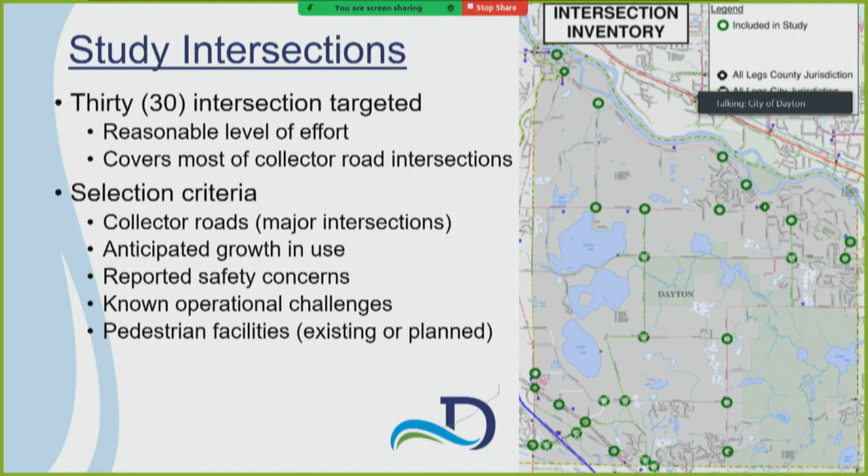Then, for prioritizing the intersections to figure out which ones we wanted to look at closer and which ones needed more attention, we selected criteria, which I'll go through on the next slide. For the evaluation, the primary focus was safety, and then pedestrian use. There's some overlap there with pedestrian safety as well, but it was much safety driven, as that's a lot of where the dollars come from for the grant monies, at least through the Hennepin County processes. It usually scores better if there are safety concerns. Then we identified thresholds for this criteria, so we knew what's good and what's bad.

They weren't necessarily specific values that say it's good or bad. Instead, we tried to use it so not all 30 fell into one category. We tried to find some balance where we chose a threshold to say these are the worst in that category, and so on. From that, we did the research to fill in and populate all the data—there are monster spreadsheets behind this with all the info used in the algorithms to calculate the priority intersections. So each category was bell curved across the 30 intersections.

But you didn't bell curve the intersections themselves, correct? Yeah, so you take one category and say these are the worst, these are okay, and these are the best. And in the next category, they could be totally different. Yes. So each category was done independently. Yes, thank you. That's good. Okay, yes.

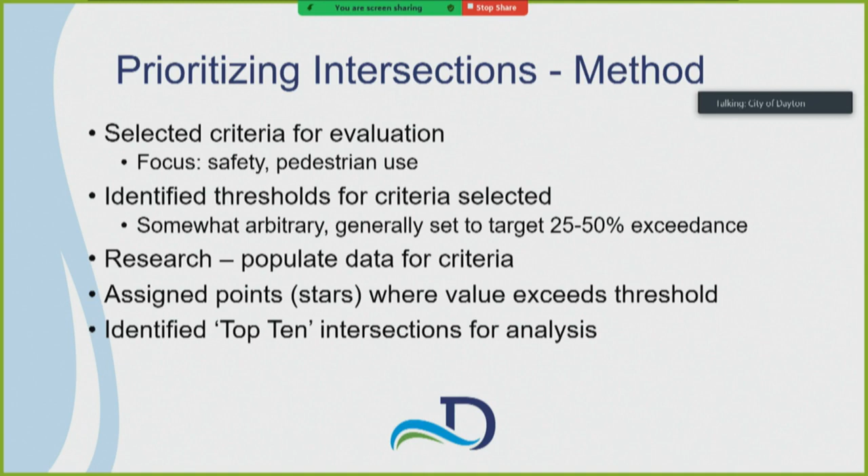And then we assigned what we did as stars or points to each one that was above the threshold in that category, and that's how we developed the top 10 list, if you will. So this was the criteria selected.

The AADT is the average daily traffic numbers, just the number of users. For this, we actually went out and hired a company to get counts throughout the entire city at all of the major roadways, so we knew how many people are using all of these intersections, and then we used a math formula to develop it.

So 5 million is the cross product between the two. We simply took how many on each leg, and then multiplied them together to get a number we could measure against each other.

Higher speed limits, we used those, and existing and planned pedestrian facilities if they were present or not. The number of lanes pedestrians had to cross—the more lanes you have to cross, typically the more dangerous the situation. We picked 4 as the threshold.

Crash data was a big one, so there's databases available for this. We went with severity—A and K severity, which is fatal or serious injury, not just property damage, but more serious than that. And then the type as well, if it was intersection related or the bike or pedestrian user related.

Skew of the intersections—in other words, if they don't quite cross at 90 degrees but instead there's a different angle—again, Territorial being a good example of that one at 81. That created a point. If they were on a horizontal or vertical curve, that could cause some sight distance issues, was another one we looked at.

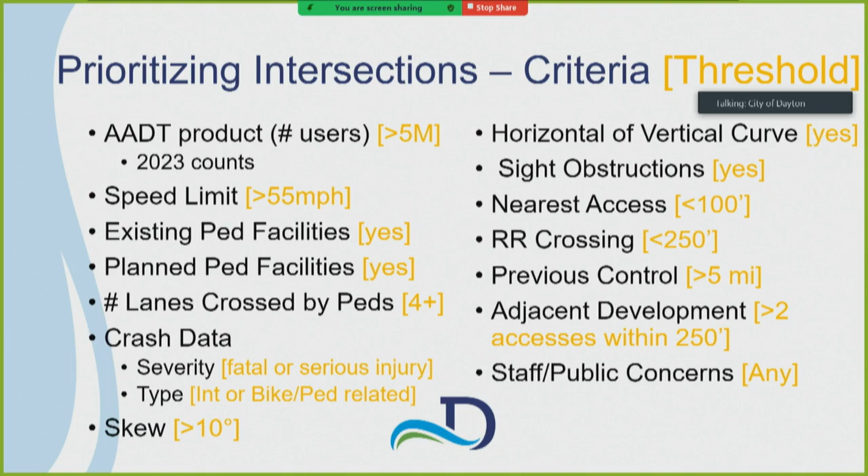And here were the results from those—those are the 10 in order of how they scored using the algorithm. I won't read all of these. I'm curious if any of these are surprising or concerning. I think staff felt they were pretty much in alignment with what we thought. I wouldn't say there were any significant surprises.

Maybe where they fell on the list was—I guess personally I wouldn't have thought River Road and Brockton Lane would be that high. Is there a lot of accidents there?

Not recently. Yeah, I wonder how that made the list. So, I have all the raw data, the report is 530 pages. I can try to sort through and get it, but it might not be a good use of time.

I'm sure a lot of it's traffic counts. But yeah, I wonder the same thing about Dayton River Road and Lawndale. There's been a lot of motorcycle fatalities on that, or intersection related. Because it's blind on one side?

Yep. So admittedly, that was the one I found most surprising until Zach and Marty pointed out what it looks like, and I went and drove it and realized why. You see the cross sitting right there. Yeah, it's terrible looking east, there's a lot of sight issues going on there, as you're on Lawndale looking east, over that hill.

So it's scored on the traffic speed limit, and active transportation facilities, so pedestrian facilities, because there is the ped ramp there.

Isn't it 30 miles an hour as you get into the city? Like 30, 55 there, stops south of there, doesn't it? Not on Brockton. That goes right up to the sign, doesn't it? Oh yeah, wow, is it?

Okay, and then there was either a fatality or a serious injury listed on there, at Brockton.

Previous control is more than 5 miles, and adjacent development probably being the McAlpine, I would guess, maybe being one of them, the access into there. Now granted, that's just an individual. I don't know which two they were.

Okay, and then also identified concerns from the staff or public. So that was where those points were generated on that one.

I do have a summary on the point one, so those are a little easier to look up. But is there any one of them on the list that you see that didn't make that intersection list that you think should have?

Yeah, so we have the priority intersections, right? We did 30 of them, identified the 10 based on the star listing and the criteria of the bell curve. But are there any of them up there that you or council see as an issue or concern that we missed or didn't get?

Also good criteria for roundabouts, that's where they are most effective. So you're going to double the amount of traffic on 117th as Brayburn Trails too finishes up there, roughly, once it's fully built up.

Any others? Just no? What about Wright County, coming out of our little portion, that neighborhood up there? Do we collect any data on that intersection possibly? We did not. I don't know if there's any concerns in that spot.

Yeah, no, it's not ours. That's not our— oh, you're right, the Dayton part doesn't get out to that road. It's like a 100-foot stretch through there, I think, crossroads down the road. Half the road is Dayton and half the road is— okay, three houses. Yeah, okay, didn't know that.

So a closer look at those top 10, we hired a company to go out and get actual data at all the intersections. They did counts at peak hours, how many lefts, throughs, rights, all of that, so we could look at the operational side of things. We also did some estimating of traffic growth in the area, using different modeling software to try to project what it might be over the next 20-year span.

There was a safety analysis conducted. I'm not going to pretend to understand this completely, but there's sophisticated software that does crash analysis, both with existing conditions that can predict future crash rates, and later in the study could be used to predict reductions in crash rates due to constructed improvements. Not a software I've used personally, but used heavily in a lot of the report.

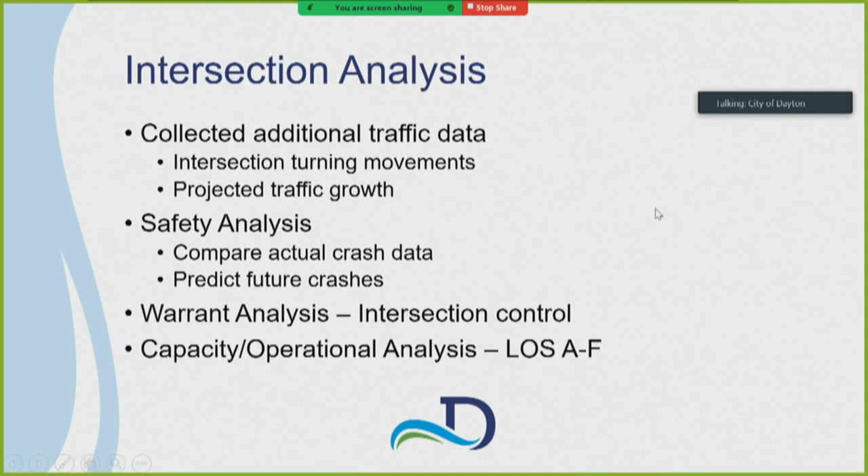So then we went through and did recommended improvements, so where the challenges are seen and what some potential improvements might be appropriate for mitigating those impacts. We did options on a few of them. Most of them we just had a single one, and then we estimated costs for the construction of the improvements.

And then again, using the software and MnDOT guidance, we tried to monetize the benefit of the projects to make them comparable, so we could run a cost-benefit ratio on these and see if the projects make sense. I don't know if folks are familiar with cost-benefit, but you monetize your benefit into a dollar amount.

You literally just take the benefit amount divided by the cost amount. If you're over one, there's a benefit to it. The higher the number, the more benefit. The smaller the number, less than one, the less benefit.

Where does the number come from? Thank you for asking. From the predictive software, and then it's monetized using software designed for this, and there's MnDOT guidance on associating it.

Sure, but what qualifies as benefit? Less wrecked cars, reduction in deaths, so there's a bunch of factors, and I'm probably missing a bunch of them, but like delays. If you're improving the level of service, there's less delay. People's time is money, so that's how benefit is calculated. I don't know what the exact values are, but the less delay caused at intersections, for example, is worth money because you're taking less of people's time. So there's a number put with that.

If you're increasing safety, it can predict, let's use an example, we're going from an intersection to a roundabout. That takes away the potential for T-bones or head-ons. So now your accidents are much fewer and they're much more minor, side swipes, so minor damage at best. Those have dollar amounts associated with them, so those are the savings realized.

It'll show on the summary slide I have here, not in great detail, but how you can kind of see how those are comparable. And then with those, we kind of took a stab at suggesting the short, mid, and long-term implementation projects.

Just meaning does it make sense to do them now, or is it maybe a little less important, or the situation hasn't really developed into a real issue but it should be monitored, and then maybe it should be done some period of time out. Purposely, we didn't try to label this with timelines because there's a lot of factors, but just to give a sense of, if we have the opportunity to build it next year, let's do it. If it's short term, if it's long term, let's monitor, kind of give that type.

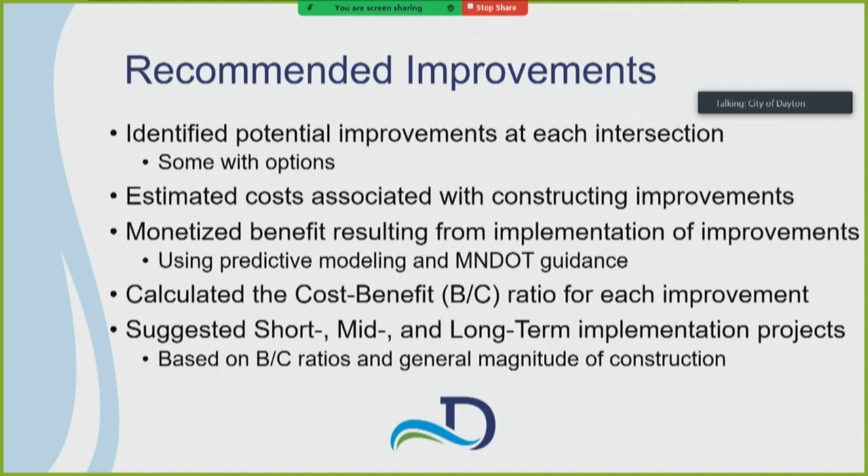So the actual recommendations for each of these. I do have these for all of the intersections, so there's a lot of them, just to prepare you.

Doing okay on time, but I don't want to get too hung up. There's about 14 slides, because there's a couple options with some of them. So I'll go through the first one. I marked a few as ones that have been discussed a little more that we could focus on, or I can try running through all of them. But you guys can let me know, and we'll see how we're doing on time.

So this one's Dayton River Road and Pineview. This was the number one intersection. So one option is to add the turn lanes.

We've had continued complaints, especially from Rosewood Lane residents, on coming out of there with the bypass lane. Now there might be some minor improvements here because the county is doing some striping changes that might help some. It's not the turn lane configuration here.

We requested that they do some pavement widening to accomplish this, and that was not an option with their project. So they're doing what they can with the striping under the current project. This would be a future improvement.

So the right turn lane is one option. Each of these will have a summary of the improvement and the cost estimate, and just to note, this is a construction cost estimate, not a total project cost estimate, but with a pretty high contingency, so it might not be too far off.

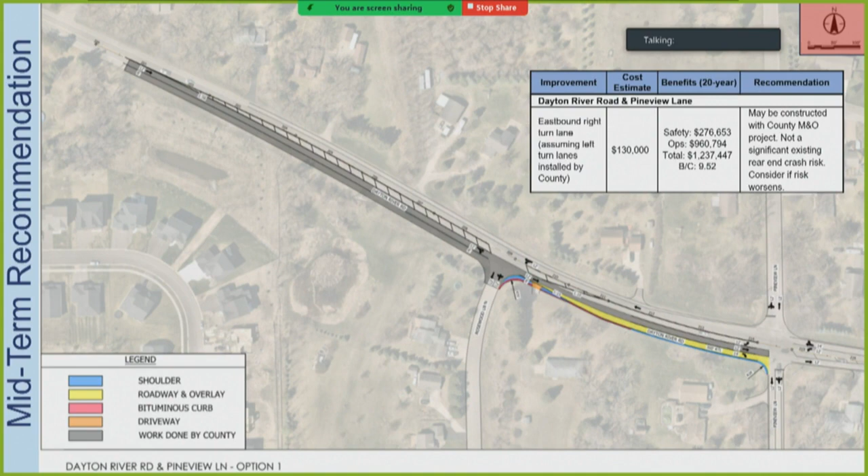Because if you have 90% or 98% of your traffic on one approach, now everybody is slowing down for the 10% coming this way. So, okay, everybody's got 15 more seconds in their life.

So I live on a dead end road that I get onto a main road with a roundabout. I think it's the best thing in the world. So I'm a big proponent of that, even when there's not a lot of traffic coming off the dead end. I agree with you completely.

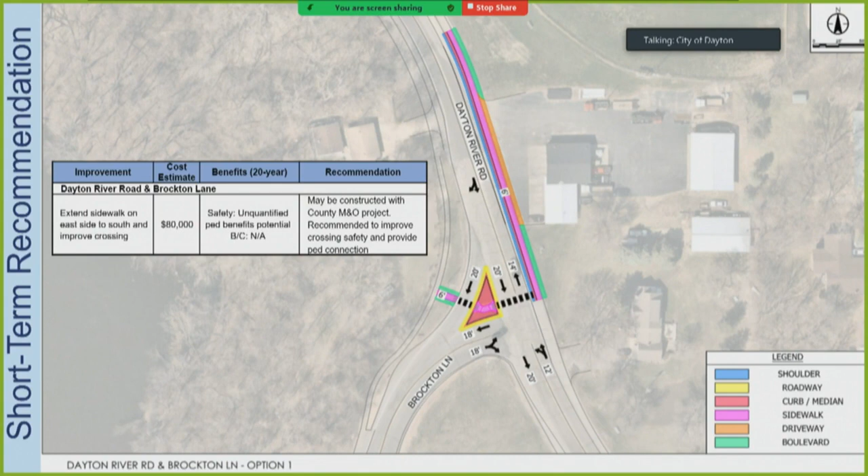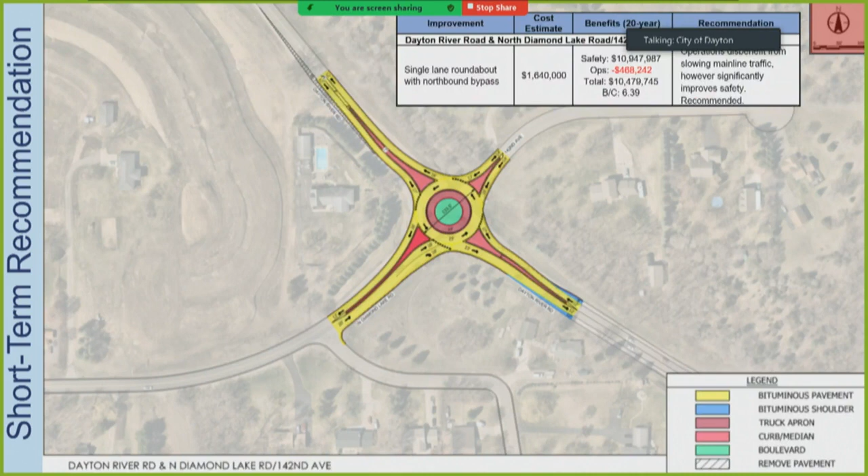Do you want to talk about Brockton Lane? No, you can pass this one, it's pretty minor. Very minor. There were 2 different options for that, and neither of them are a roundabout there. No, they weren't, they were more pedestrian driven for the safety of it.

This is the one I think is probably the most talked about intersection. So the roundabout option here, this is a short term option. Right out of the gate, this has a great cost to benefit ratio through here, so it would be a great project. One thing we're all aware of, both county roads, so depending on their participation level, this might be a tough one.

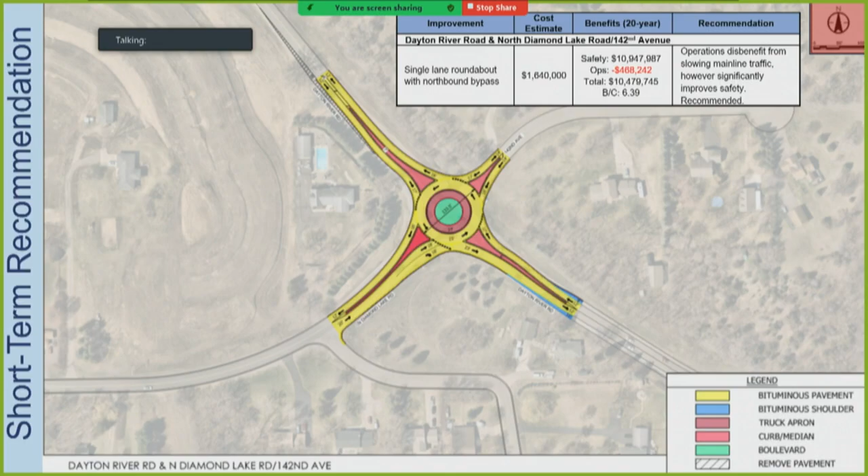Is it fair to assume in this case where 3 of those intersections are county roads and one's a city road, and I realize the majority of the traffic is not there for the city road, is it fair to assume they'll expect us to pay a quarter and they'll pay three quarters, or that we pay two thirds and they pay one third? Unfortunately, the latter, because we've had this situation before, just like on the other end. We've always gone in, I'll use Territorial as an example, because I've requested that one on their CIP a lot. That's Territorial, city road, 81, so 2 of the 3 legs, so I keep proposing the city pay 1/3 of the intersection, and it actually flops, it'll be no less than 50/50, but probably you pay more, that's kind of the answer.

And now their program, the one they're pointing us to, caps at $500,000 regardless of project size. Oh really, caps at a half? At $500,000, that's the program when we're asking about these intersections. Can we do that with the contractors, this is how much we'll pay? Sorry, it's a cap. For example, we recently asked about 117th because of the Rayburn East development, and if we should be looking at upgrades there, and they pointed us to a program that was capped at $500,000, which is the one they're suggesting for most things we ask them about, at least.

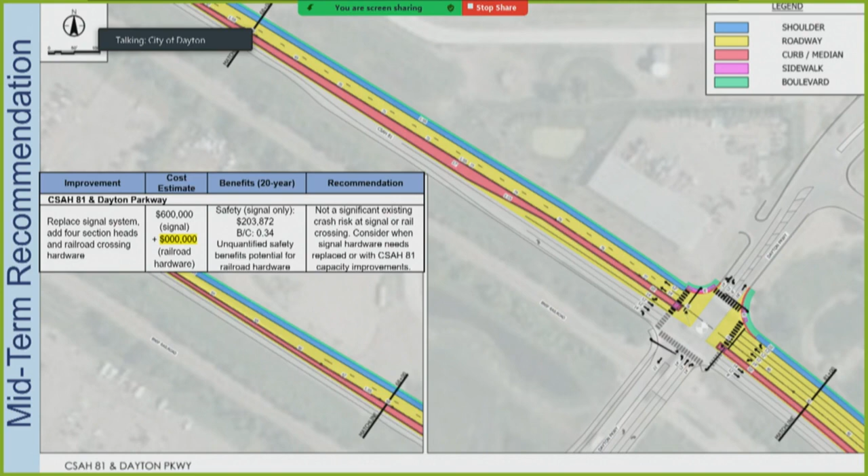So 81 and Dayton Parkway, not much to talk about. This will be accomplished when upgrades are done to 81, or midterm. In honesty, it's probably long-term. One thing that was very difficult, we don't know what the upgrades to the railroad would be. They're usually very significant, I'll just say that. But they don't give us the number until it's time for the project.

So here's Lawndale, I'll just touch on it briefly. This is kind of the extreme one. As mentioned, to the east is a large hill that really takes away from sight distance, leading to a dangerous situation that might exist out there. Again, this is a pretty significant undertaking. Here's an option that might provide some benefit if the realignment isn't accomplished - there'd be some grading just to take away some sight issues. Again, this isn't going to solve it 100%, but it's at least an improvement that could be implemented.

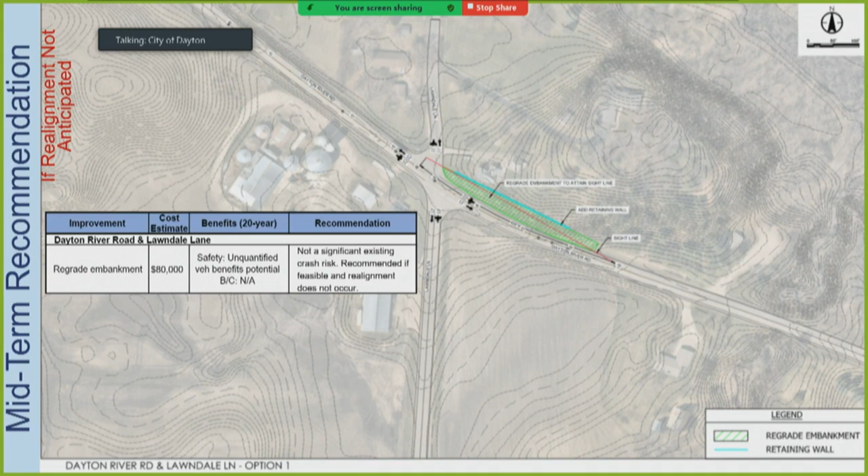Can you go back? The estimate's the same, cost-wise. Am I looking at that right, or is that a typo? Put the wrong one in there. Sorry about that. For $80,000, that seems like a pretty good deal. I was like, you guys are not - new road, land acquire, or grade that whole hill? I was gonna say, that looks like a pretty good deal, huh? That was a cut and paste.

Do you know what the cost is, Jason? I am seeing if I can get through - I'm gonna guess it's gonna probably be in the 800 range. You forgot a zero. It's literally the same thing, re-graded - it was a base cut and paste, so it's not anywhere close. I'm gonna guess it's not even close to 80. Yeah, I assumed as much. That's why I said something, because the first one was like, 80 grand doesn't seem bad to fix. You should just sign on the dotted line, you don't ask any questions, man. Just sign, okay, take that for 80 grand.

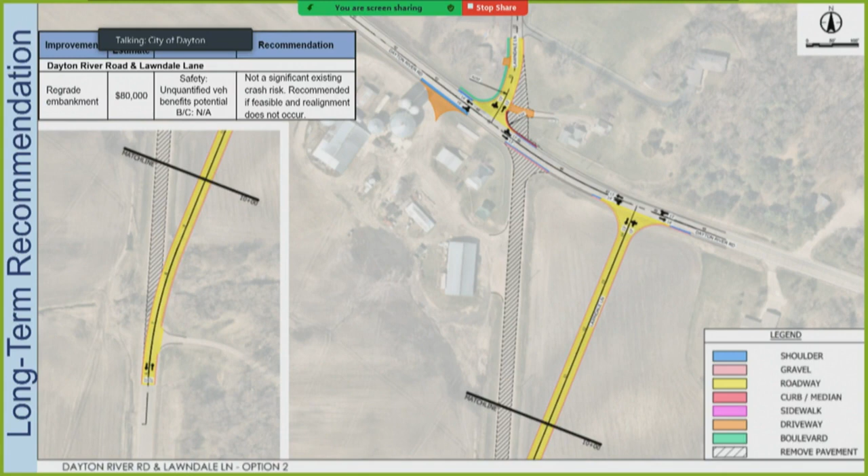There'll be a bunch of change orders on that one for sure, given the different elevation going down to that field - 620,000. I'm surprised it's only that. I think in the end it would be about $1 million. Remember, this is just construction costs - there's engineering, but no acquisition for land. The benefit to cost on that one is 0.42. Again, just a minor improvement that could be accomplished on that one.

This is another one that's probably come up more, at least as of late - Rush Creek Parkway and Fernbrook, into the park. Mostly, or at least what I'm hearing, because of pedestrian concerns or desire to use it for pedestrian purposes rather than traffic, but we do hear the traffic concerns as well, with people coming down the hill at 70. My understanding was Tom wanted to do this, or he wanted something other than what we ended up doing out there. Yeah, but the county wouldn't go for it. Well, I think the park - I heard the park didn't want it. What was the story behind it?

This is something we can still get around - something to do with the grades coming out the other side. He wanted an underpass south of here. I know he wanted that, and we tried to move it north, but we couldn't get it to work. Didn't he also want a roundabout here? He even had the money to put into it, and then we got told no, and he put the money into landscaping instead. That's what my understanding was. I don't remember that, but maybe - that's my understanding of what I've talked to, the developer that did that development.

And there was some sort of problem, whether it was grading or offset, of Fernbrook. There were problems with the turn lane improvements. They had to shift the turn lane because they needed more parkland, so they had to alter the turn lanes. I don't remember, there was some sort of roundabout discussion or issue maybe related to it.

And it's still really confusing, even if you come up on it from the west. Did they ever reline that thing, repaint it? Because there were no markers, no arrows on there. I think that was it, yeah. But even coming up, I don't know.

The north-south approach is bad, because if you're coming from the south going north, you can't see people waiting to cross, and they can't see you coming until you're right in the intersection. If you want to turn left to go across, you can't see anyone until they're at the intersection because of the way the hill mounts there.

So a couple things I'll point out here: this was purposely fit in. There would be land required from Faithbrook Church on the corner, and also from the developer, but there doesn't seem to be any significant obstacles. You can also see on that hatched area, that's the existing pavement, so we'd actually be shifting the pavement away from the park, so no additional impact on parkland, which is huge given the LAWCON restrictions.

They're getting pushback already from the development as it is today, and if they're the ones holding up a whole roundabout from going through, they're going to have even more pushback. The church would be the same way though—they want their people to get in and out safe. So yeah, the acquisition cost of this one would be fairly reasonable, but still, it's three times the cost.

Certainly it seems like the roundabout is the better solution. It moves traffic better, but it looks like there's quite a difference in cost. So we all agree the roundabout's better, but it costs more.

Okay, well, I think that's generally pretty typical. Well, yeah, I was curious if there's a bunch of stuff we wanted to get done. We talked about the intersection cost, but we haven't talked about whether we think any of these are worth the cost to start getting things done.

Not necessarily this intersection—whether it's Pineview and Dayton Road or whatever intersection we pick—but we can do the studies all along. If we're not willing to get anything done, the price is just going to go up the longer we wait. You just got to figure out how much you're willing to spend, and that's the projects you go after. That's how I'd look at it.

And then where's the funding coming from? Where did this one sit on the list? This one's like 5, 6, I think. Yeah, 5 or 6, somewhere in the middle, right in there.

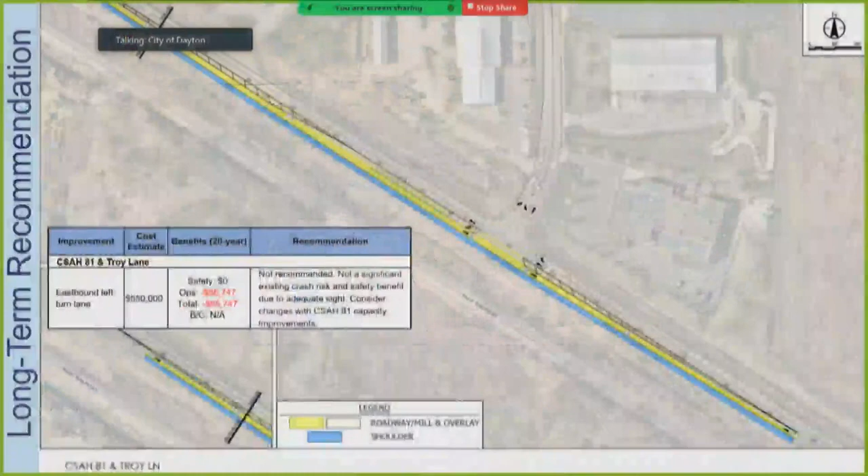Well, and there's a couple of county ones in there too, so we have about 40 big intersections. How much land is on the north yet to develop there? Is that on this one, on the west side?

Between here and 117th, is that what you're talking about? Yeah, all the way. So from Rush Creek Parkway to 117th, you probably got about 80 some acres left. Then you gotta talk about the Braeburn Trails East development, which hasn't technically gone yet—that's another 40. You're talking about 750 more homes north of here, south of 117th.

So you're talking about 1,500 more cars. I'm just wondering—you know, we lost the transportation fee, but it seems like I thought there might have been a mechanism where we could allocate some of these outside costs to developments. I mean, that's what's driving this. And is there a path there?

Negotiation with the developer, sure. Enforced through the DA, so we can ask for it, but we can't mandate it. Well, if it's a PUD, we can do whatever we want, right? Yeah, for sure.

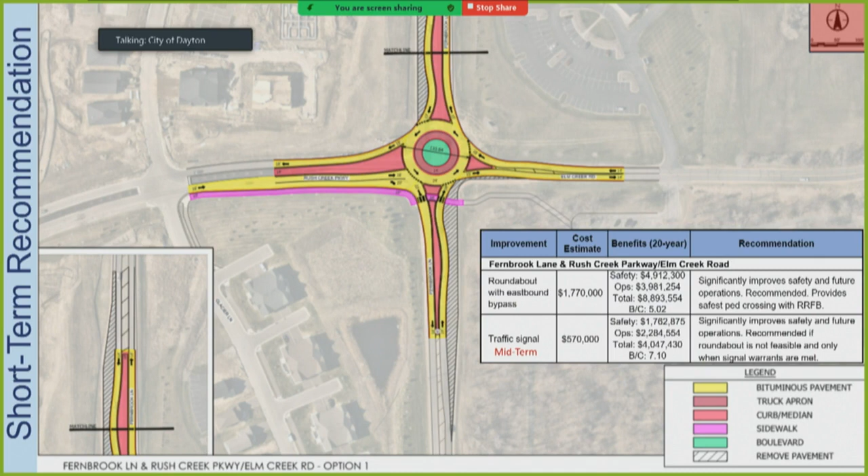Certainly, if they don't ask for a PUD, then no. I want to even say Braeburn Trails happened after the fees went away, if I remember right. It did, and they paid for all of 117. Well, so did Nate's, whatever his development was. Hayden Hills - in fact, I think he ended up paying for those.

Pineview Meadows, you talking Hundred? Meadows, yeah. So, no - Cypress? Is it Cypress Cove? That was about the time we were negotiating with Tom also for Island Gardens. Oh yeah, and I think he still, even though he was part of the lawsuit, paid fees because he saw that as part of the PUD process, I think.

I think there'd be some sort of process we could go through where we could say this is allocated. I don't want to play attorney, but if you can create the nexus that, short of this happening, your development's premature and our infrastructure can't support it - there's a case for it, for discussions. I don't know, once you get into the legal realm, I don't know where that falls, because there's no statute backing the requirement for fees for transportation. They're not protected the same as sewer and water.

But certainly not unheard of. We're doing pretty much the same thing on 81 and territorial - we're saying we're not doing these things till we figure this out. So, which is why it's good we did this, we've got some of the stuff done now. Leverage.

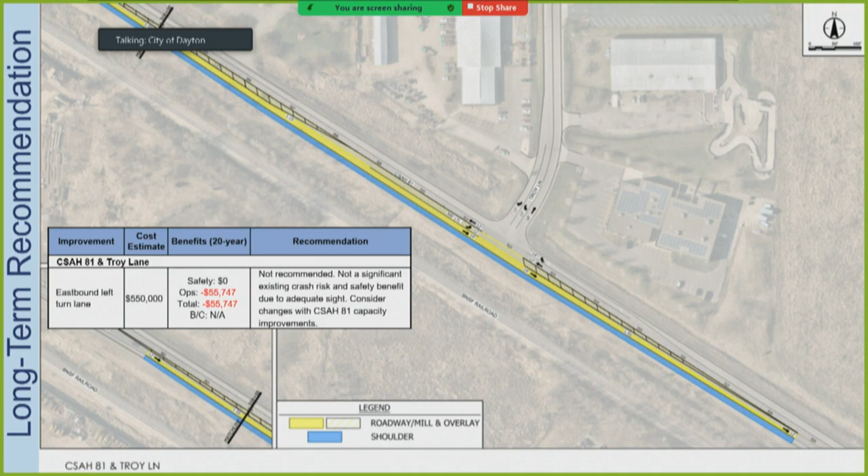Just a few more, I'll go through this one, I'll just breeze through - this is Troy Lane in 81. I would just say this gets done either when needed, when the Troy Lane traffic level builds to needing it, or when 81 improvements are done. So it's just a long-term monitor, and then when needed.

Again, this one we've discussed - this is the one the mayor just mentioned, in fact. But this is specific to, we just used the same drawing, specific to the 81 improvements, so it's a smaller cost because it's just those improvements on there.

And then the last one, we did not have - the report will have all of these figures as well, of course, all of the existing ones of all 30 that are shown on the right.

We did not have a SketchUp of this one. This is Dayton Parkway and Holly Lane Territorial.

So just by Cemstone, if you will, between 81 and the interchange. Not really on the radar because it's a new intersection, maybe, but kind of a challenging intersection, just with the vehicles getting in and out.

So we looked at it two different ways. One of them for pedestrian use is to get the pedestrian crossing across there, so that some RRFBs could be installed. They'd have to be a pretty elaborate system, most likely ones with mast arms, where there's multiple lights to bring driver awareness up because there's so many lanes going through there.

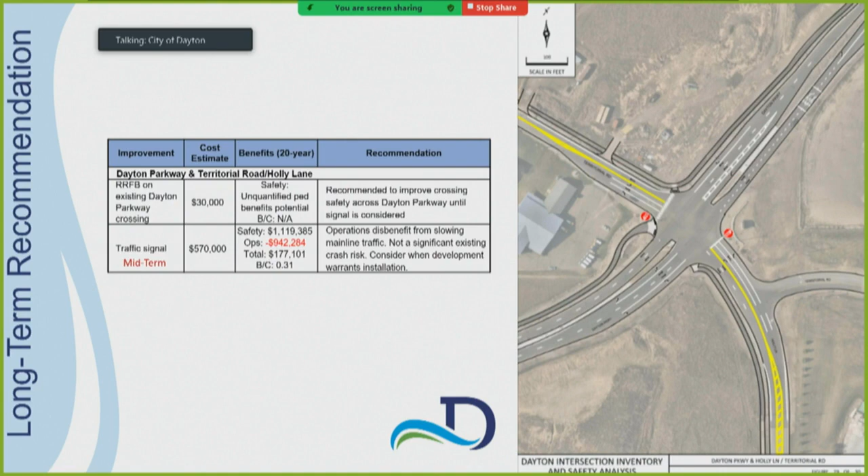So, going back one, Jason - back one. Yeah. Well, that's not the one I want. No, that one, I'll be dead before that one happens. This one - oh, that one right there, yeah.

That does not have a light factored into it, huh? It does not, no, it does not meet warrants for it. Doesn't, really? If we funded it, would they allow it? That's a great question. I don't think so - I think they've said no.

Really? Yeah, that's my understanding. We asked - could we even pay for these things as part of this process - and we asked them, if we fund a light, will you put it in here? And they said no, we won't allow it. They generally don't like them until they're warranted, because again they create delay on the main line, which is typically their road.

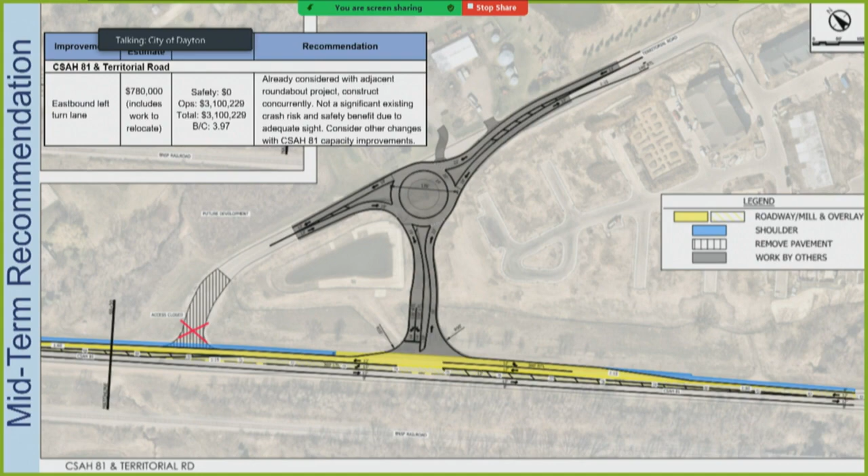Correct. So, but they do the same when it's both their roads, so at least they're consistent I guess with it. Conditions written - that was it, we actually got through all of those.

Tomorrow, Billy - we can get volunteers to do it, but we're trying to keep that place, it needs some work. It's a drone photo from a resident that sent it to us. Yeah, that was pretty cool.

You think 1 and 7 are the biggest priority? That's what I think are the bigger priorities. So you're saying forget the science and the stats and go with your gut?

To be honest with you, in the last couple of years we've had more accidents at River Road and North Dunwoody Road than we had at River Road and Pineview. That's one that surprises me, because that's the one I'd heard was the worst intersection in Dayton.

The one on Pineview? Number 3 - North Diamond and Dayton Road. Yep. So the fact that that's number 1 was surprising - I expected that to be number...

...1. Wow, so I expected the order to go 3 then 1 for 1 and 2. So I was surprised that it was in the order it's in. But I know the construction they had going on caused a lot of confusion.

That's when the road was majority shut down, and that caused a lot of our accidents. But it will be under construction still - more accidents there than we've had at River Road and Pineview. So I don't know if you know, Paul, the accidents on that intersection over the last 5 years.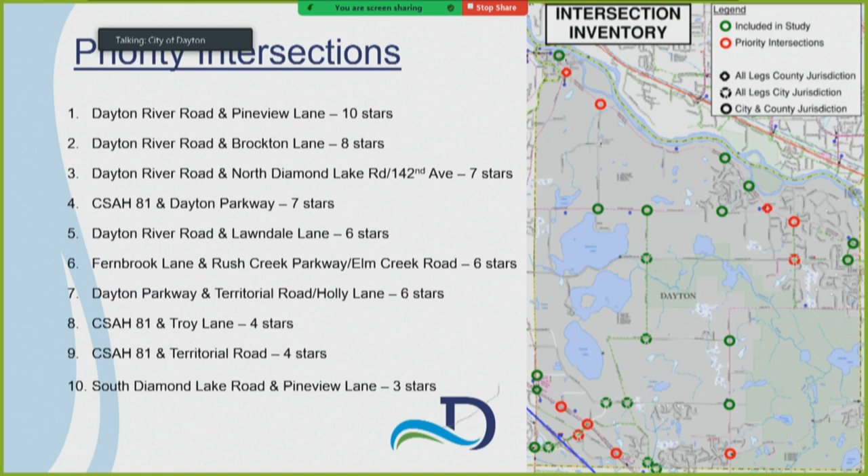1 serious injury, 6 rating of B, 4 rating of C, 3 rating of O. I don't know what those are exactly, but I get to see they're just diminishing in severity.

North Diamond, number 3. Yep, North Diamond and River Road. So that fatality was more than 5 years ago? It would have been between Pineview and one, near Pineview Meadows, right by the pond along the road. That's really close to where the fatality was. Someone crossed over, drifted across.

And then there's been 8 angle or left turn accidents, 6 rear end accidents. So there's been a lot of incidents in that one. Yeah, that's a nasty one, but it's 2 county roads.

So is this anything we can get to the county, as in here's some additional information for you to ponder, please? So that was one of our initial thoughts with this, to create it in a way that best aligns.

So the county has, let me get this right, HSIP, safety—the S is safety. It's their program, safety implementation or safety improvement program, I think. It's something they have that they allot dollars to in their program. They have a county-wide list of all their identified intersections. Pineview and 129th was one of those. That's how we were able to get the funding for it. It came from a different pot of money, not from their infrastructure or build-out fund. It was from a safety program.